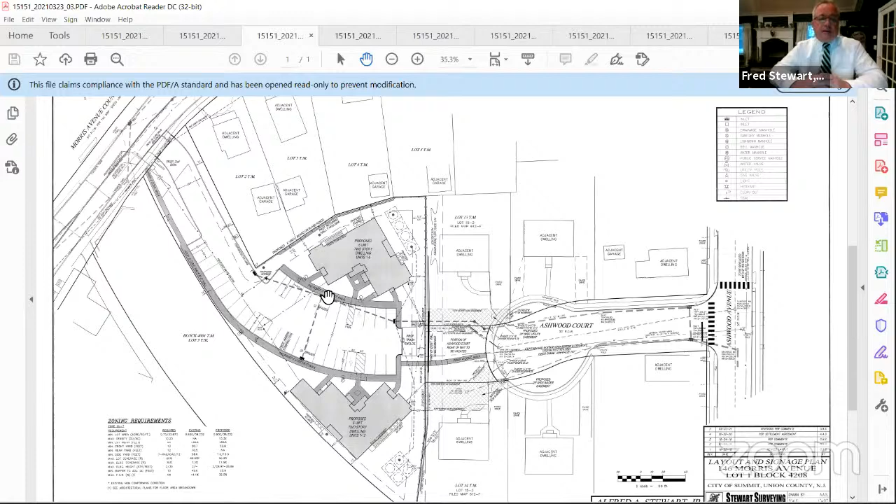Now, within that access area that goes out to Morris Ave, we have relocated the water main, which comes in from Morris Ave, the larger of the two mains available to us. That's a 10-inch main out there.

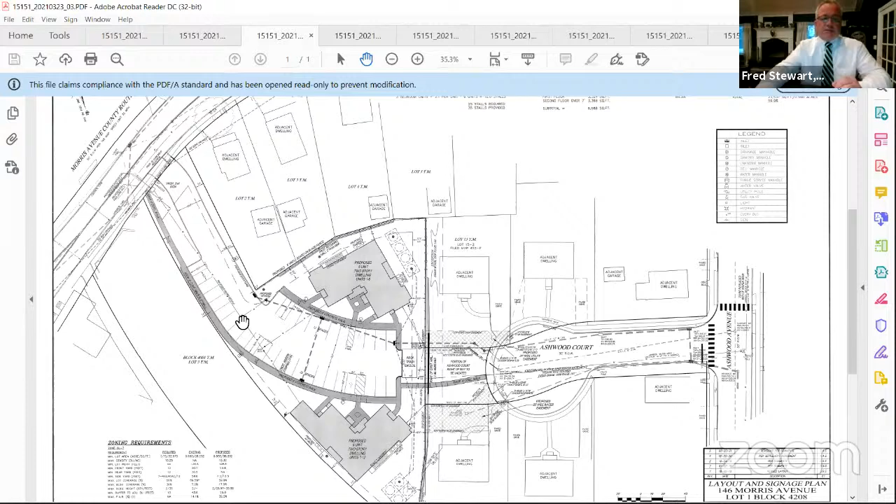We did relocate the water main or water service to come from there onto the site, proceeding to a proposed fire hydrant located near the corner of the property, servicing the two buildings. The former location was from a water main on Ashwood Court, but that main is slightly smaller than the one on Morris Ave. We are in discussions with New Jersey American Water, and we believe we'll be coming in from Morris Ave with that water main. That's where it stands as of now.

As I'm in this area, I'll go over the sewer system. That previously came from our property to Ashwood Court, along with the drainage system within the right-of-way of Ashwood Court, this dark line here, which terminated at our property at this point. We are still proposing to go to Ashwood Court with the drainage and sewer, but those lines were relocated to a proposed easement north of the right-of-way, this hatched area, on lot 13. They are granting us an easement to place those utilities within that area, going out to Ashwood Court.

Now, from Ashwood Court, we are also proposing a 4-foot wide concrete walk to be located within the right-of-way, as per the settlement agreement, in this section here, which will come up to the property line and go through a gated access onto the property, continuing on to the various walkways on our site. Now, Fred, that is a private pedestrian walk.

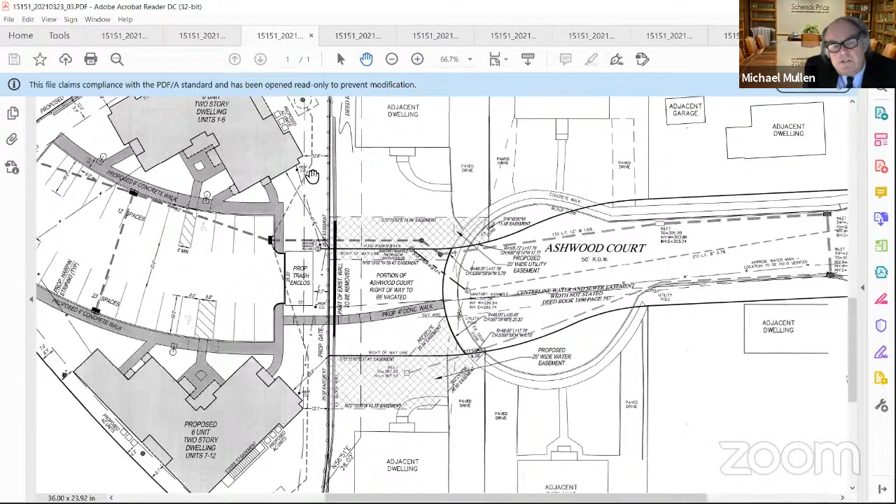So in addition to the relocation of the sewer and the installation of the private walkway, as well as the new entranceway off of Morris, what other changes have occurred with respect to the plan for this project? Okay, now in accessing from Morris Ave, that opens up the opportunity to add some additional parking, which we did.

Formerly we had 27 parking stalls. We are now proposing 35 parking stalls. We added some additional stalls in this section right here off the access drive, a right-hand turn off the access drive. That did increase our impervious coverage, of course. We were formerly at 58.2% with the prior approval. We went to 59.9%. Required impervious coverage is at 60%, so we do meet the zoning criteria for that.

We also relocated our monument sign, which was formerly near the termination of Ashwood Court over in this area here. We relocated that sign to be near Morris Ave, near our entrance, right here. We did note that it's 5 feet off the right-of-way line. We believe the ordinance calls for that to be 10 feet off the right-of-way line, which we will verify. I know that's within one of your professional reports, so we will bring that into compliance if need be, to 10 feet off the right-of-way line.

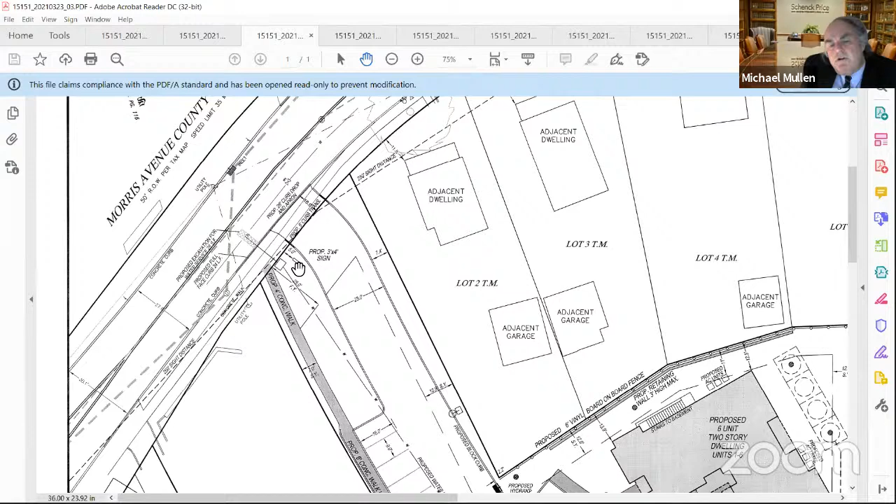So the plan there, Fred, is just to coordinate with the Summit officials as to whether it's 5 feet or 10 feet, correct? That's correct. Okay, now also, another change would be to the lighting, which now I'll go to our lighting plan.

Of course, extending the access drive out to Morris Ave, we will have to provide some additional lighting. And extending the parking area with more stalls, you have to extend the lighting as well. We had 4 original light fixtures located within the parking area. We added an additional light fixture to illuminate part of the access drive and the parking stalls right off of it. There is a light fixture located across the street, directly across from our access point on Morris Ave, on that utility pole I'm pointing to now. So that will illuminate the entranceway in this area, and there will be sufficient lighting.

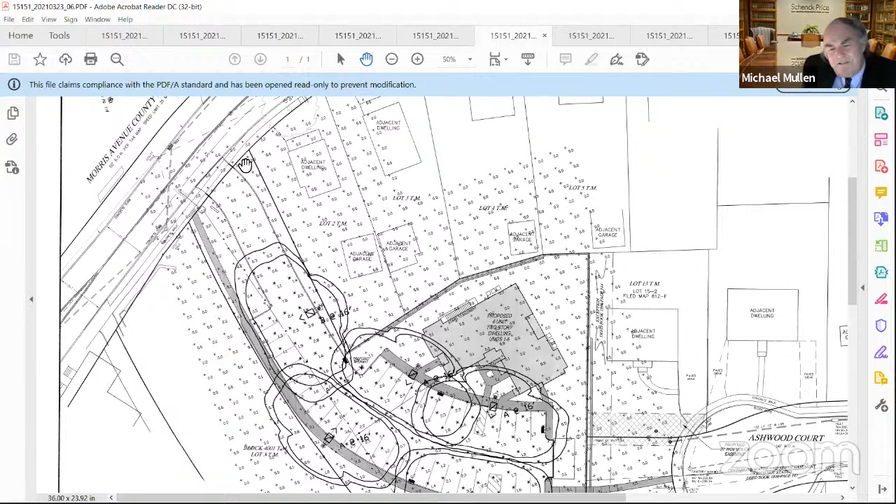And I did note there were some comments on that. Since I'm on the lighting, I might as well proceed with those. Go right ahead. Okay, we did note that the light fixture post was at 16 feet as proposed. Your requirement is at 15 feet, and we'll gladly comply with that. There's also the intensities - there's two conflicting things there. One of your professionals said 3,500 K, another said 4,000 K. Again, we'll verify which one's correct, and we will comply with that as well.

There is some over-lighting near this boundary line. We will provide a back shield on this fixture to protect the overflow from going onto lot 2, the adjacent property, so the back shield should protect that from any additional lighting. There's also a comment about the lighting near the trash enclosure that's been relocated to the rear of the parking area, right in this section here. We'll increase the lighting in that area to comply with the ordinance.

Fred, are there any other changes with respect to the trash enclosure area as a result of the settlement? Yes, there's one more note about the lighting. One of the professionals would like us to show the building lighting, which is basically residential in nature, typical coach lights with maybe a 60 or 80 watt bulb within those fixtures, near the doorways. That's what we're proposing on the buildings.

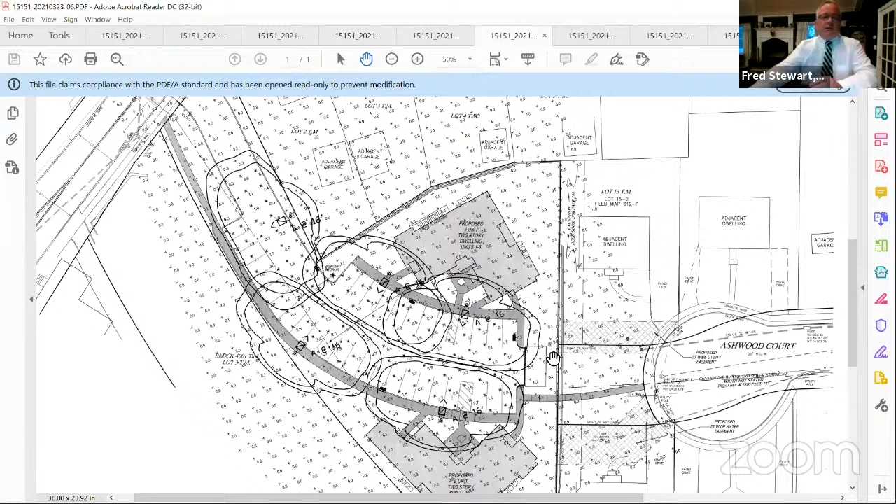That is noted to be - let me go back to my layout plan - just right in this section here. Noted to be 7.7 feet off the rear property line, or the right-of-way line of Ashwood Court, soon to be the rear property line. Required is supposed to be 12 feet. Due to the site configuration, we placed it at 7.7, but we did provide some additional screening to protect the view of the trash enclosure.

Let me back up a little bit. Formerly, we had a 6-foot stockade fence running along the boundary line up to the former access point. We will extend that stockade fence across the boundary line of Ashwood Court to the other side where we proposed the fence previously as well. That'll screen the trash enclosure.

And going to the landscape plan - back up on here, but there we go - we do have some additional screening with vegetation, 2 trees on either side of the trash enclosure at the end of the parking area, some shrubs across the backside of the trash enclosure between the fence and the enclosure, and some small plantings along the walkway. And on the north side of the trash enclosure, some other small plantings to better screen the trash enclosure itself. The trash enclosure will be of block construction and will be 6 feet high.

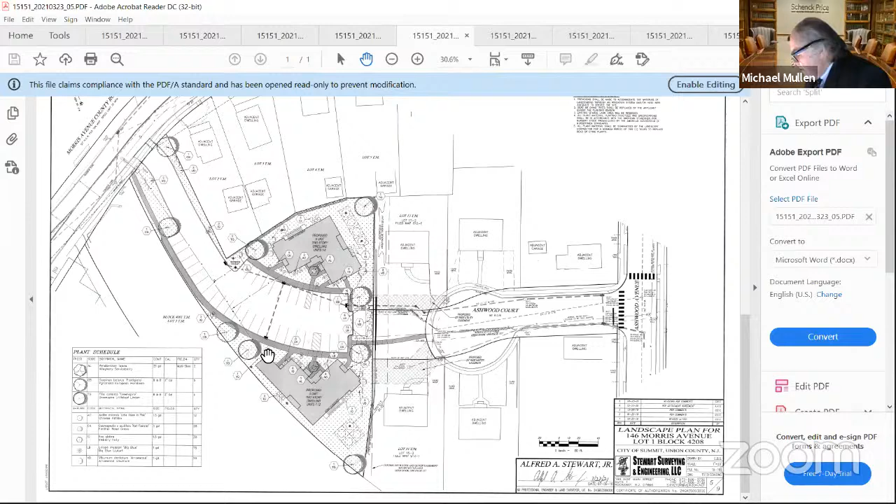Fred, I'll direct your attention to the Colliers Engineering report, page 3, beginning with items number 9 and 10. There is a comment in the engineering report as to the sidewalk access. What's your understanding as to that particular comment? This is on number 8, I apologize.

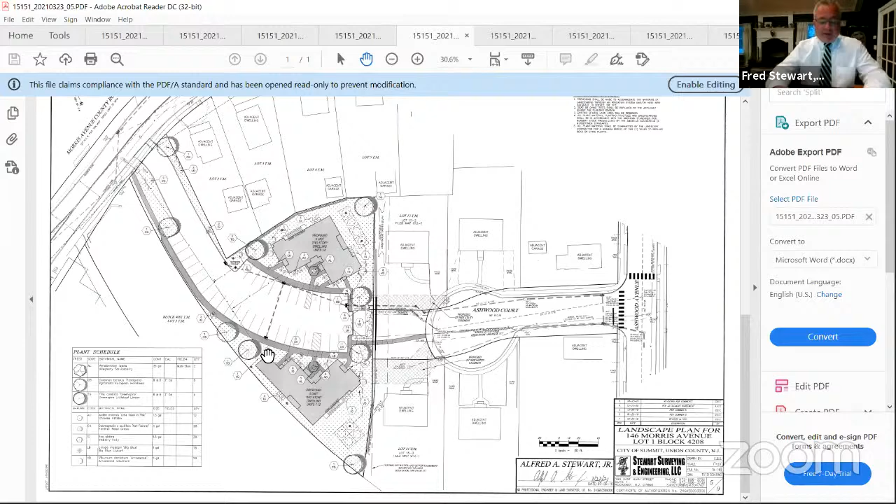Oh yeah, that's basically the sidewalk we show is within the right-of-way area, and that's per the settlement agreement. If and when the area of that right-of-way is ever developed in the future, that's when the sidewalk would be relocated into one of the easements.

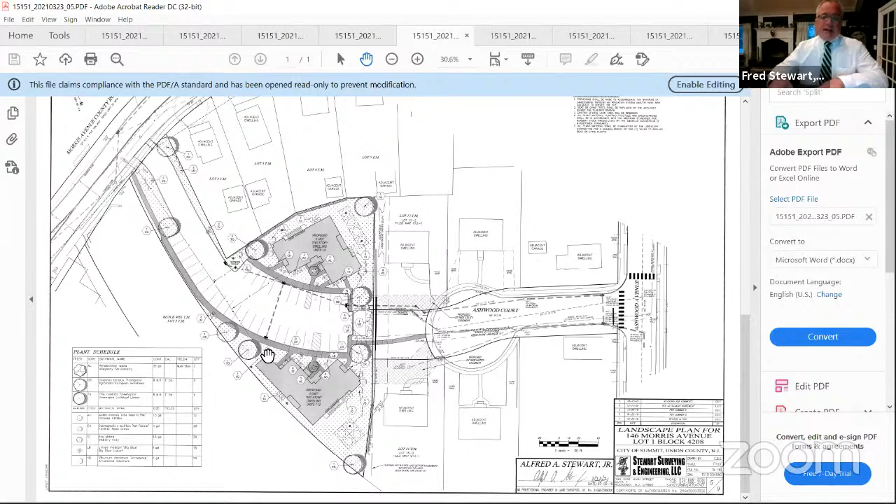Does it follow that number 9 speaks of a related issue? Yes, it speaks of the right-of-way area. If it's vacated, there is a guy wire within that area for the existing utility pole, holding the pole. Again, that would have to be relocated at time of construction or future development of that Ashwood Court right-of-way area.

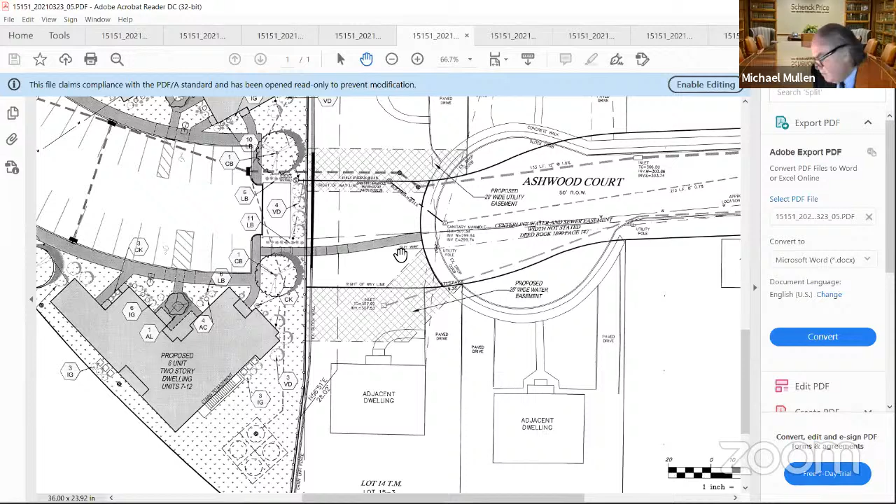Fred, I'll direct your attention to point 11 of the report pertaining to the retaining wall. What's the upshot of this comment and the applicant's view of the same? That's regarding the retaining wall running along the common property line of our lot 14 to the south and lot 13 to the north, within the right-of-way area of Ashwood Court. That's an existing retaining wall.

It is a hybrid wall on lot 13 - I believe a modular block wall that extends down into the right-of-way of Ashwood Court and then picks up with an older concrete or concrete block wall extending into lot 14. In doing construction for our project, we will be disturbing that wall within the area of the Ashwood Court right-of-way and within the proposed easement located on lot 13.

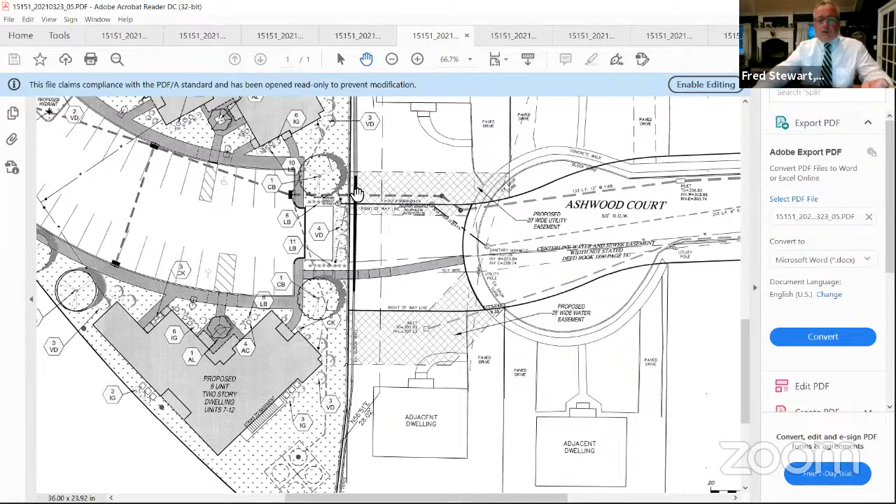The disturbance is due to the extension or connection of the drainage and sewer lines into Ashwood Court, right in this section here. The further disturbance comes down within the Ashwood Court right-of-way to a point about 8 to 10 feet from the boundary line of lot 14. That black line is the area of wall we are going to disturb. What we intend to do after disturbing it is bury the wall underneath the proposed grade, and I will go to our grading plan.

And what we are proposing is to fill that area in and basically slope it downward and eliminate the portion of that wall within the Ashwood Court right-of-way and a small portion of lot 13.

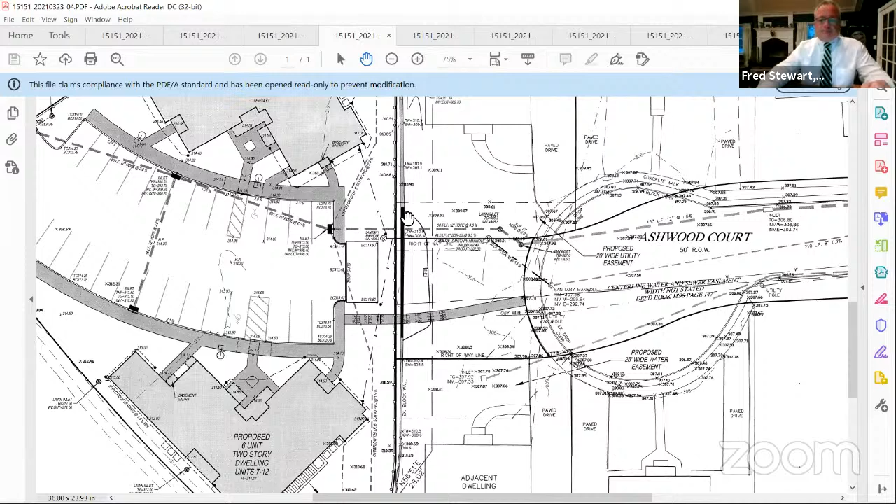Fred, since we were talking about parking earlier, I'm going to direct you to comment 22. I guess what I'm really looking for is just a reaction. Apparently people are preferring a hairpin striping of the parking lot. That's correct, we'll provide hairpin striping. I do have two details, one showing hairpin, one showing normal striping. We'll remove the normal striping from the detail sheet.

There was also a question asked as to the parking lot, which you described as adding additional space. Does adding additional space in any way imperil any ADA compliance issues? No, it doesn't, we're fully compliant with the ADA standards. I know the question was if we feel a need for additional handicap accessible stalls. We do not.

And Fred, in your professional opinion, you're aware that as a result of this application and the settlement it's necessary for Habitat for Humanity to seek out certain variances. With respect to the variances as a whole that are being sought, do they in any way threaten or undermine the existing zoning scheme for the city of Summit? In my opinion, no. And does the request for relief from the ordinances in any way impair safety or health concerns at the subject site? No, it does not impair any safety or health concerns.

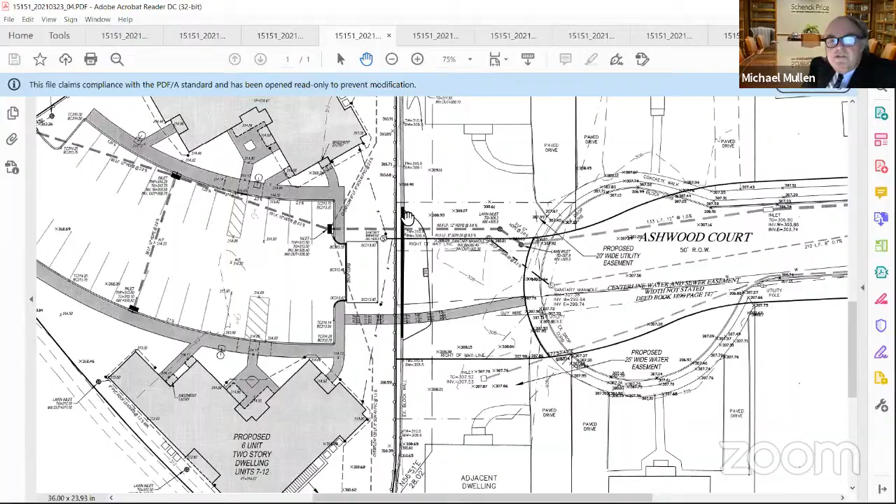Okay, ladies and gentlemen, I don't believe I have any further questions for Mr. Stewart. I certainly encourage you to ask any questions which you might have, but I believe he's gone over the salient points with respect to the differences or issues that have arisen as a result of the settlement. It's awkward because you guys lived through six sessions of testimony in terms of all the gory details of this project. But at the end of the day, as a result of the settlement, the substantive changes to the project are rather limited. But the applicant is here and ready to answer any questions you might have.

It was our pleasure to spend those six sessions on this subject, I'm sure it was, so much so we wanted one more. But let's give our board professionals the opportunity to chime in.

Mr. Dower, is there anything further you'd like to highlight from the engineer's letter, or further questions? Two items. One was the approximately 10 parking spaces that are deficient in length or depth as you drive into the site. I know Krista mentioned that as well. The question would be if you could narrow the sidewalk from 6 feet to 4 feet to make them more compliant.

Fred, what's your reaction to that particular suggestion that had been discussed in the past? There is that possibility, and those approximately 10 spaces, I believe, are at 16 feet in depth. But I do, from what I understand within your ordinance, that's allowable to decrease a stall by 2 feet from the 18-foot standard that you have. But I also do provide a 6 foot wide walkway, which does allow for the overhang of a car by 2 feet into that walkway, which still allows a 4 foot pedestrian area for walking.